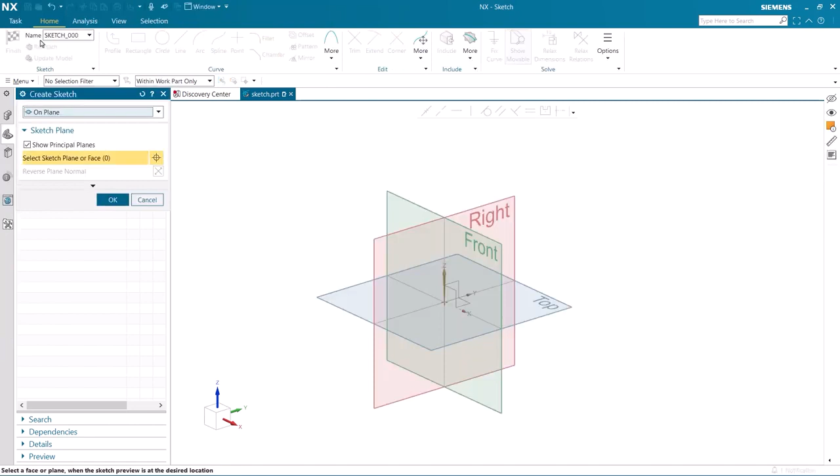Let's first open a sketch and create a profile. Let's use the profile command to create our sketch. This will make continuous straight and curved lines, which reduces the amount of commands we need to use to make our sketch.

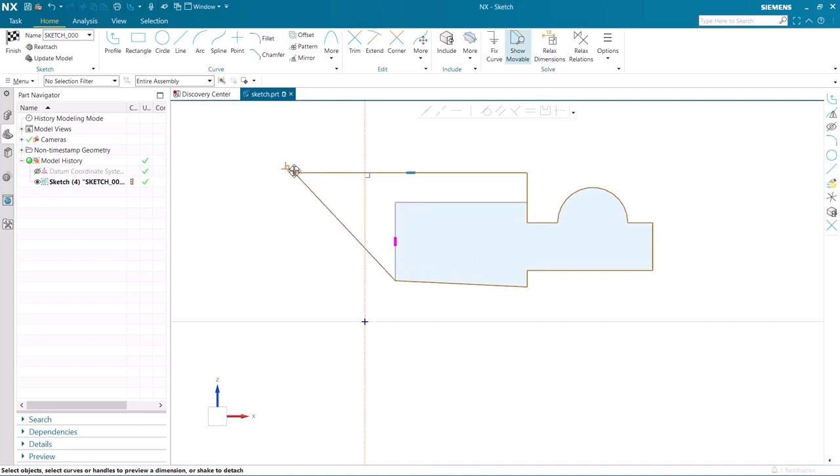I am now going to drag this point into a different position. When selected, both the vertical and horizontal relations are found. When I select the vertical relation, it turns purple and relaxes, and when I move the point, the horizontal relation remains, allowing the top line to stay horizontal.

Relations are an easy way to control the shape and angle of a sketch. Here I am making this bottom line horizontal.

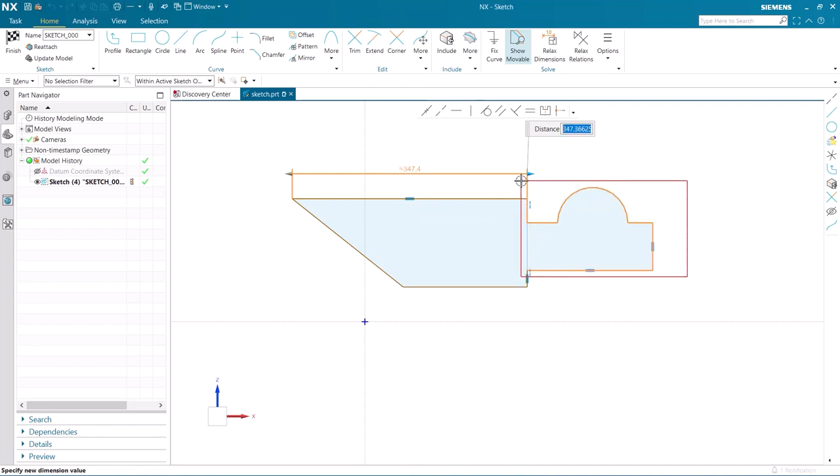I would like to change the length of this upper curve and also move several other curves with it. To do this, I select the curve I want to change and then select the other curves. When I change the length, the other selected curves move along with it.

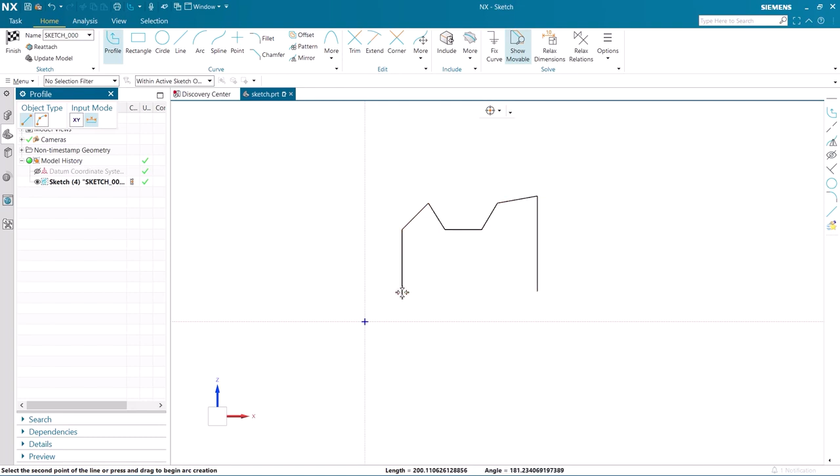I am again going to use the profile command and make a sketch, this time with curves of varying angles and lengths. It is easy to make the two peaks collinear by using the collinear relation. When one line is moved, the second one moves with it to maintain this relation.

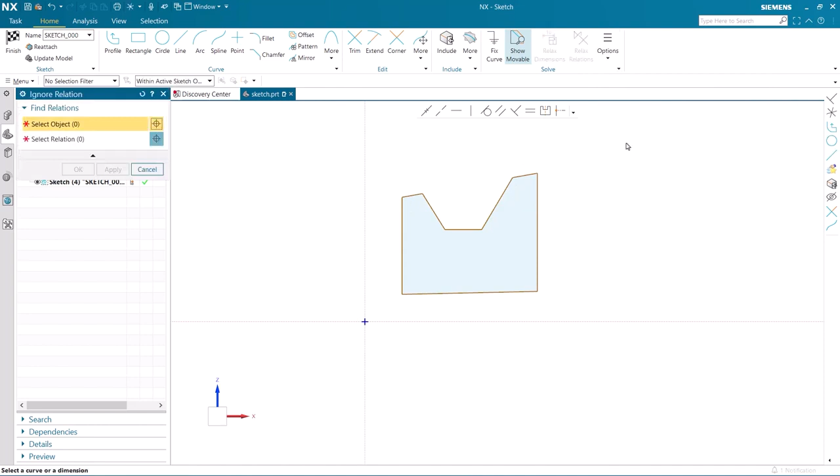Using ignore relation, I can now change the design intent of the sketch. I first select the curve, and then the relation that was previously found. As you can see, the ignore relation symbol appears, and when I move one peak, the second one does not move with it like it did before.

Let's recap what you have seen. You saw me drag a point on a sketch by relaxing a vertical relation and maintaining a horizontal one. I then moved several curves when I changed the length of a line by selecting them. Finally, I used the make command to force two lines to be collinear, and then used the ignore relation to change the design intent of the sketch.